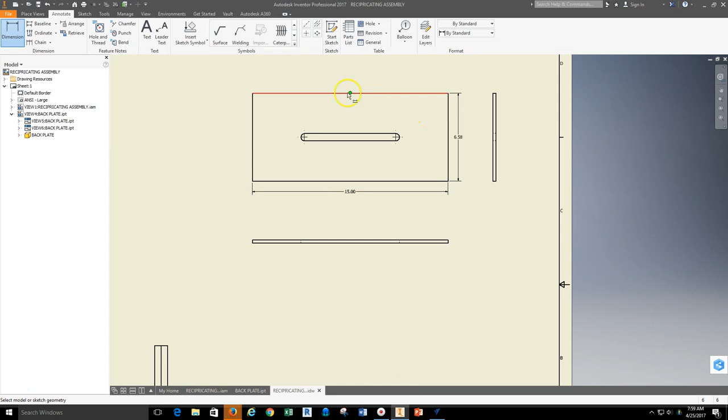First thing is I have to set up the stock. How big is the material going to be that I'm going to cut my part out of? So we need to set up the stock and figure out how big of a piece of material we need to cut. So I'm going to run back into Inventor. I just laid out the back plate. This is the back plate of my assembly here.

And the back plate of my assembly is going to be 15 by 6.58. So I just need to have a piece of stock that is slightly larger than that. So I'm going to go ahead and set up my width here. So we'll set this up to be 18. And then the height on this we'll just set up to be 8. Then I'm going to come down here to thickness.

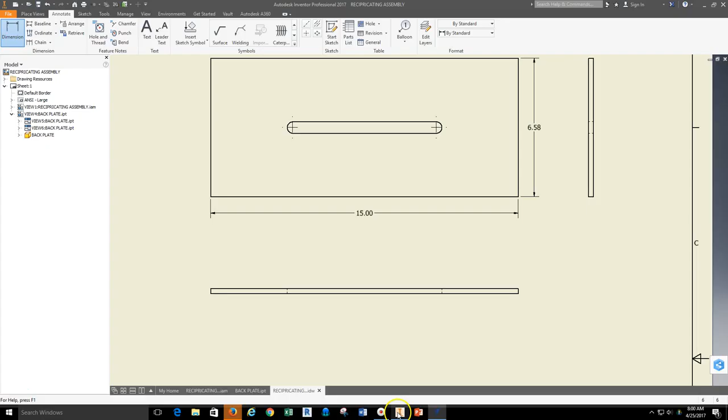And I know that this is going to get cut out of a piece of stock that's going to be 0.25 in thickness. So we're looking at a 1/4 inch of thickness here. So with a 1/4 inch of thickness, I run back into VCARVE and I set that up to be 0.25. My 0 is going to be at the top of my stock. My datum position or my XYZ position is going to be at the bottom left-hand corner. Sort of a standardized way that we set this up.

And then we're going to run in inches and just run down through and hit OK. So now I have my stock set up. This is going to be the material I'm going to cut out of. I'm going to run up here to where it says File. I'm going to come down to Import, and I want to import component 3D model. So I see the back plate. I'm going to grab the back plate from my 3D models. I'm going to hit Open.

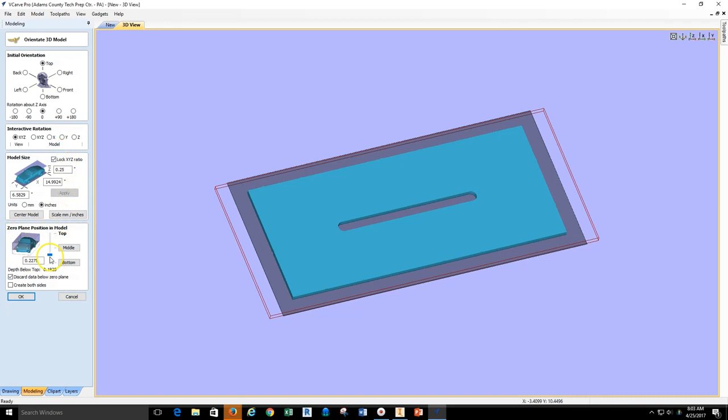This brings in my back plate. Looking at the initial orientation, running down through here, all looks good. I want the 0 plane at the top of my part, so I just slide this up to the top. And it says discard data below. I don't want to discard anything, so I'm going to uncheck that, and then I hit OK. Now, with this set up, there's 2 tabs at the top of the screen. One is 3D View, and one is New. I'm going to go back to New because I want to actually see this part.

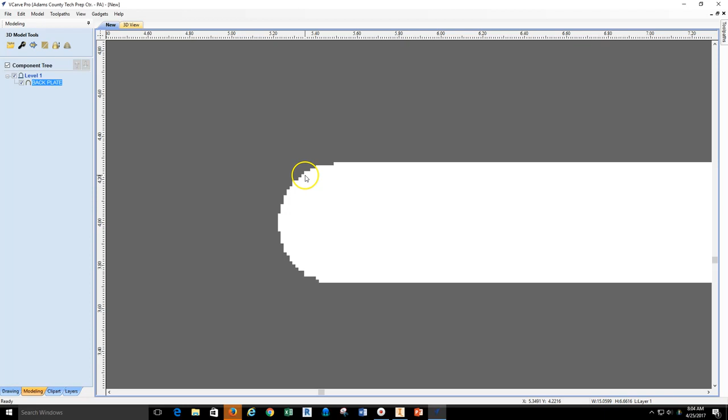Now, this is where I run into an issue with this program in relation to running Mastercam, in that you can see all of these small little steps running around here. These little steps do not make a smooth curve, so all these steps are going to make a very rough curve. So first, in order to get vectored lines from a raster image, I'm going to select the back plate, and then come up to this button right here. This is Create Vector Boundary from Selected Components, and I create a vectored boundary.

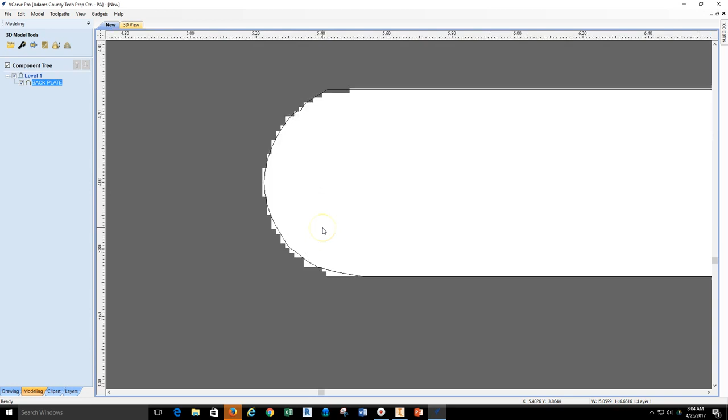Now, that's a line boundary, and when I look at this, you can see there's some little bumps in the particular vector. In fact, I'll click on it so you can see it a little bit better. This is not what I'd like to see in a nice, smooth, curved arc. Straight lines generally come out just fine, but when we get into curves, that's when we start to have little bumps and wiggles. So the tool that I've found seems to work pretty well to take care of this is I go into Editing, and I select this button, Fit Curves to Vectors.

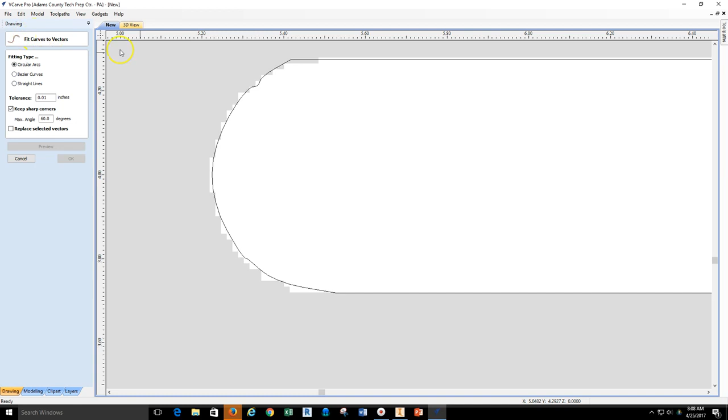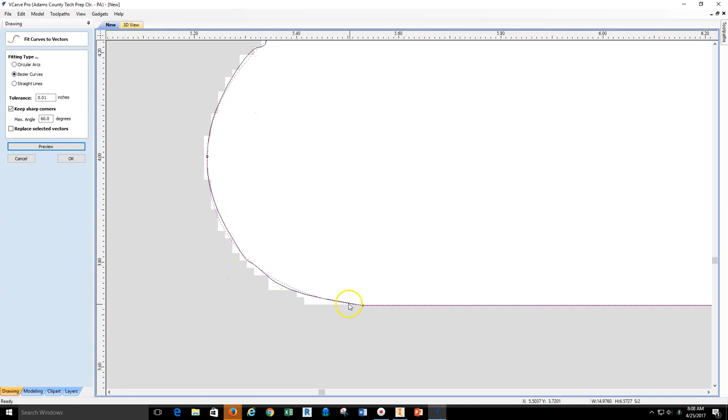Okay, so we're messing around with fit curves to vectors. What I found is that this Bezier curve seems to give me a nicer, cleaner curve than working with circular arcs. So I just select that vectored line, select Bezier curve, and then hit Preview. The new purple line is the curve that has been created, smoothing out the highs and lows on the original vector. So I can just select the original vector and delete it, and now I have a smoothed out curve. Still haven't run this enough to get great concepts of how this is going to work.

I have a test set up and I haven't run through that test yet, but right now that's what I'm going to run with. So going ahead now, I'm ready to start tooling this. Tool paths are located on the right hand side, and tooling this part's going to be fairly simple. We go ahead and grab the 2D profile, and again start working our way from the top down. The cutting depth, start at the top, go down to 0.25 is great.

I'm going to use an 1/8 inch end mill. I'm going to come in here and just take a look. It's set up for an 1/8 inch end mill, 0.125. It is an end mill. Diameter is correct. Pass depth: you only cut in pass depth half the diameter of the bit. So that's half of that, 0.0625. Stepover, that's all fine.

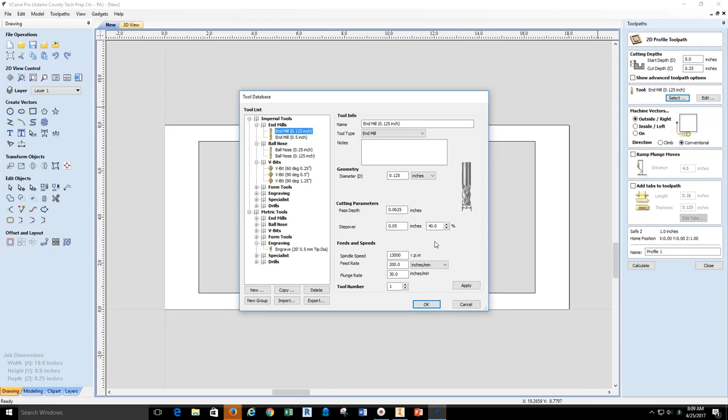Spindle speed, 13,000 RPM, and our feed rate is going to be 200. This was already calculated for the chip load of 0.008 coming from a double fluted solid carbide bit cutting Corian. So with that all set up, we're going to go ahead and hit OK, and then I'm going to keep sliding down through here. Outside right, inside left, we can take a look at that. I think I want to run inside left for this particular run through.

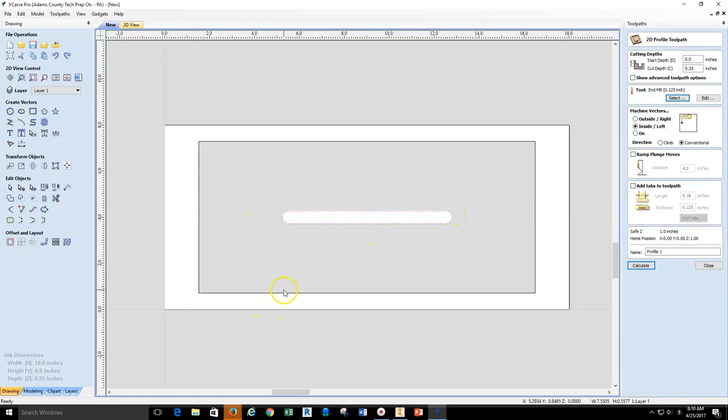And I'm going to come down, and I just first need to select what I want to cut. First I want to cut the inside arc, then I'll make another path for the outside arc. So we'll go ahead and calculate the inside arc here, and this is what it's going to look like in 3D. We'll go back to view so I can take a look at the path. The line with the arrows is the path itself, and I can see that it's now going to run up and around. It's on the correct side of the line. That's fantastic.

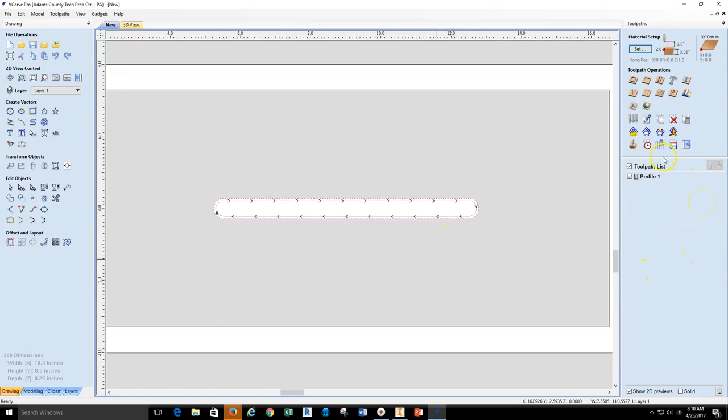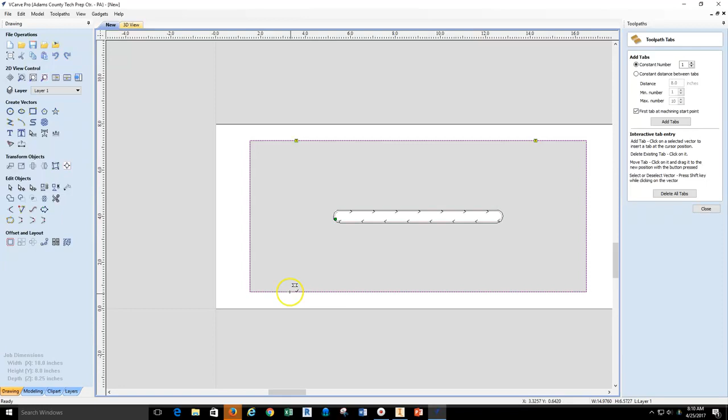So I'm going to go back to my toolpaths and go ahead and hit profile again, because now I'm ready to cut the outside of the object out. So I select the outside of the object. Here I want to be on the outside running right, so it's going to run around the outside of the object. And coming down, I actually want to have some tabs so this thing doesn't go flying off. So I'm going to select add tabs, hit edit tabs, and then I just want to select where I want to put these tabs so this part does not fly out of my stock. And I'll put 4 tabs on it. Go ahead and close that out.

Right now the length of my tab is 0.18, height being an 1/8 inch, 0.125. It's fine, and we'll hit calculate. So I can see that I have tabs here created in my 3D part for the outside. I do not have tabs on the inside. That's fine. And then we're going to go back to this particular view. There's my tab symbol down here. So I'm now ready to save this out and to go over to the machine and make a cut.

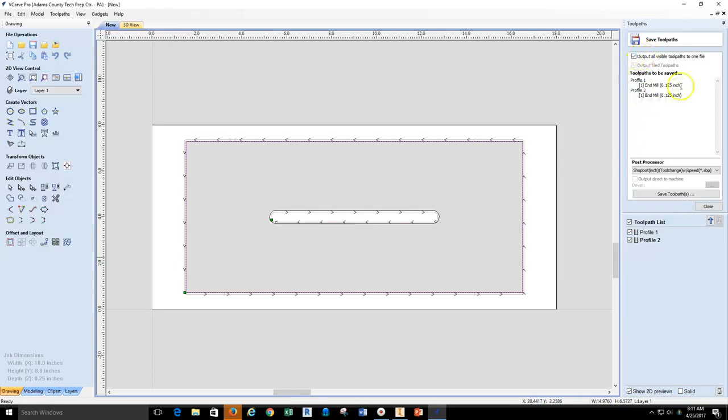So with that being set up, I'm just going to close out. I'm going to hit save toolpath. And these are the toolpaths here that I can go ahead and save out. Save toolpaths. And save this out, call this backplate 2, because this is just a class sample, and then I'd save it out to my file. Now I'm ready to go over to ShopBot and make a cut.

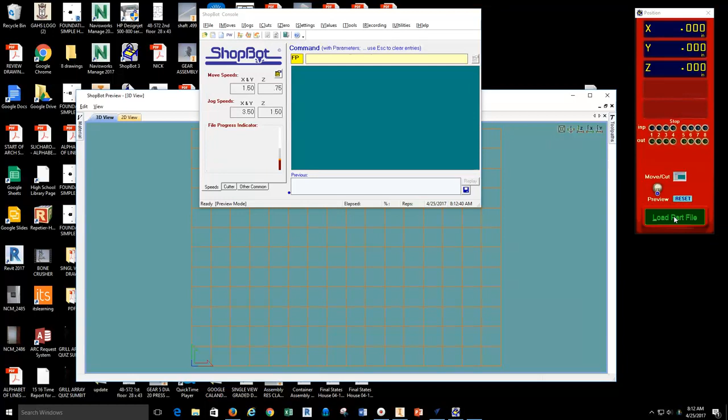Alright, so I've gone ahead and opened up ShopBot. I want to go through and run a quick preview. I'm going to go ahead and hit load part file. Highly recommend and will require that you run a preview before we run any parts on the CNC machine. So we're going to go back to the server. We're going to go ahead and pull up the parts and pieces that I've just gone ahead and tooled out. So I'm looking for where I saved these parts and pieces so I can pull this up.

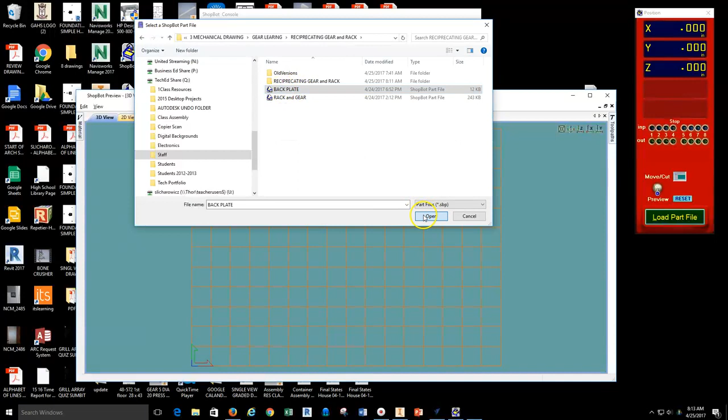There's backplate, hit that open. And this is just going to run a preview in the space here. So this should look like my part. Should be able to go ahead and rotate this as well so I can see how deep it's going to cut. So we're going into my part. I've got 4 tabs set up there, and I believe this was the first one, not the second one I just ran through, but I can see I've got tabs set up.

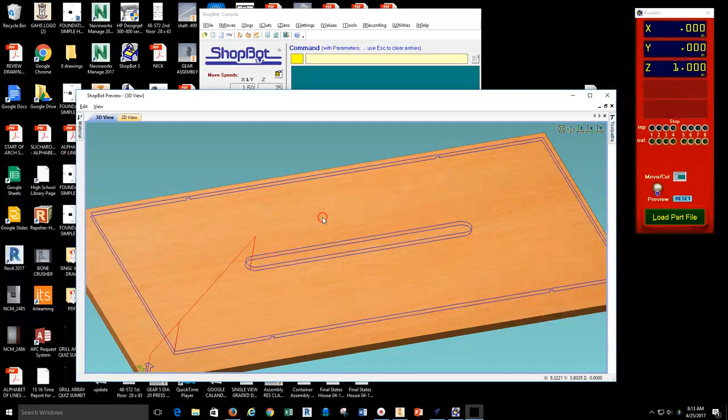Yep, things look good. So this is the cut that I'm going to want to run, and I always want to preview this so I know that ShopBot is going to do what I've asked it to do before I actually go over and run the machine. All right.